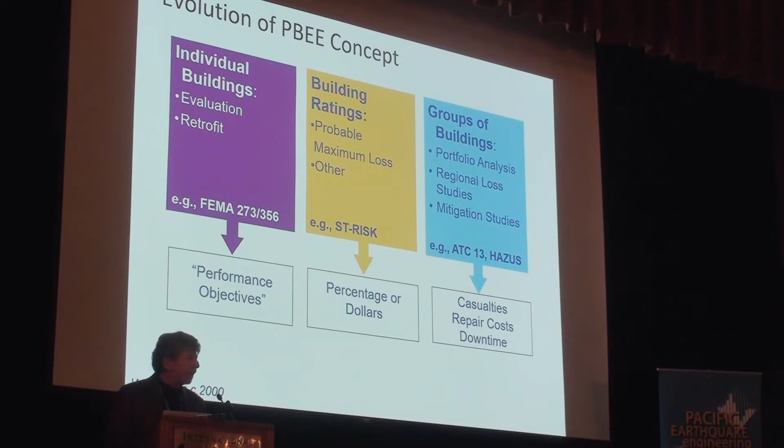In between was building performance ratings, the so-called PML, which is looking at dollars. Bill's point was really what PEER is after is kind of a convergence of these things—trying to bring them together under one performance engineering framework, if you will. And I think we successfully did that to a degree.

We certainly brought the performance engine into the building model. Folks are familiar with our triple integral equation, breaking down this process—going from the ground motion through the damage to the losses and the consequence. This maps over nicely to looking at an individual facility, or a bridge, or another thing like that.

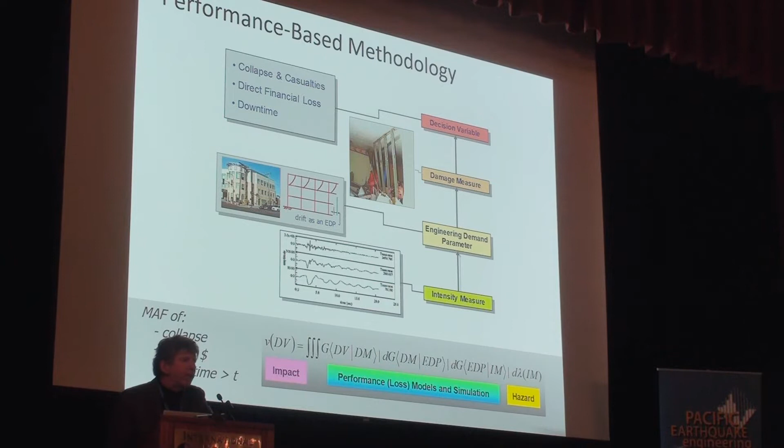In concept, it carries over to distributed frameworks as well. In fact, early on it was work by Anne Kiremidjian looking at transportation networks. But I think we still have a ways to go to take this methodology to these regional simulations that can, I think, really inform disaster recovery.

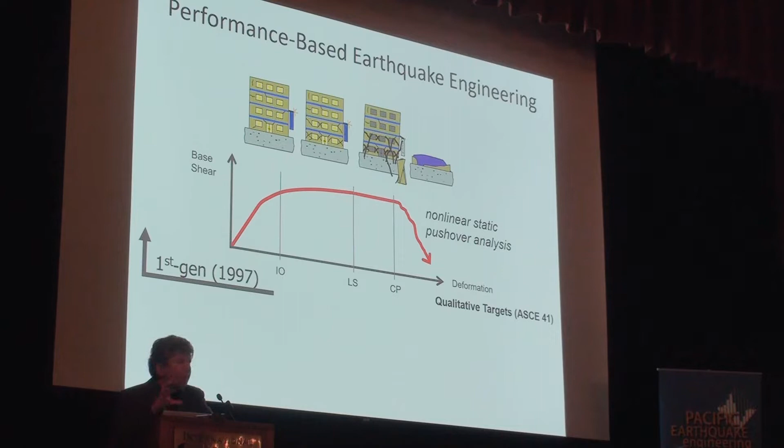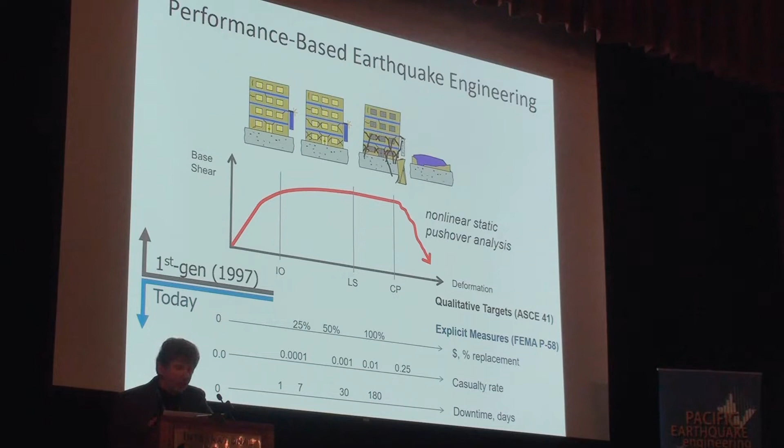At the time, again, FEMA 273 was our performance state of the art, if you will, for evaluating buildings. If you think of where we've brought that through today, through PEER's research and subsequent efforts, looking very quantitatively at the losses as a continuum, casualty rates in buildings, and downtime metrics—that was then pulled into FEMA P-58.

There's now software out, and it's becoming pretty routine for some engineering design offices to apply this to buildings and advise owners on looking at alternate structural types, how they could get higher performance buildings, and what would be the value in terms of the reduced dollar losses.

I think that the repair time, and further the downtime, are still things we're grappling with. I'll talk a little more about that.

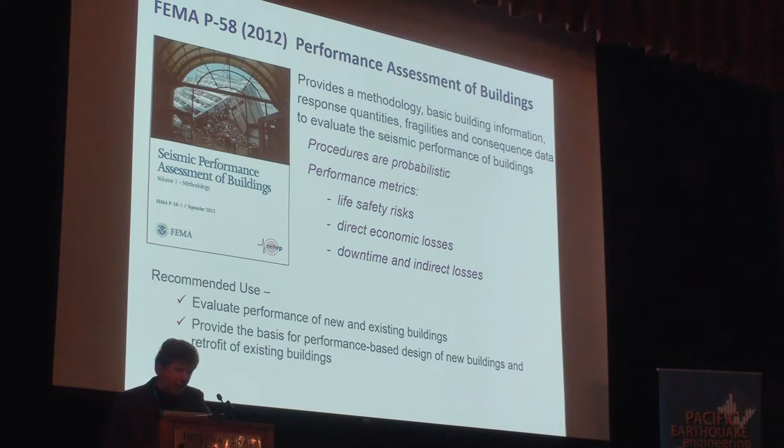About the same time, actually about 10 years ago, P-58 was coming out at the end of the first 10 years of PEER, when this technology and this framework had matured.

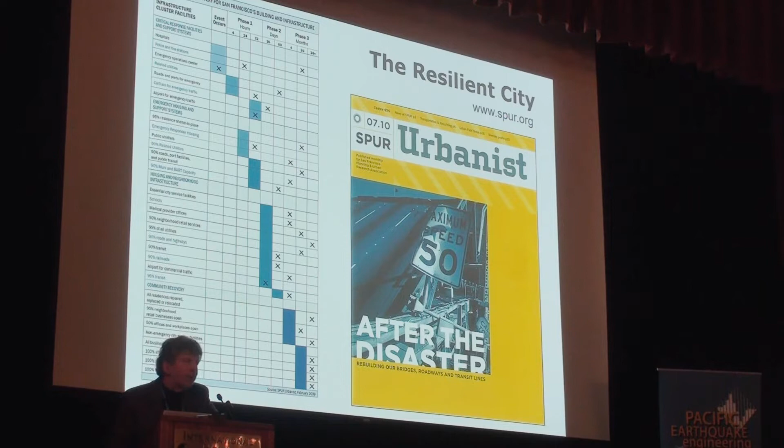San Francisco was underway with the so-called Resilient City Project from SPUR, championed by Chris Poland, along with a number of urban planners, city planners and so forth coming together to look seriously at the city—that is, if a big earthquake happens in San Francisco, what's going to happen to buildings and other infrastructure, how does that affect services in the city, and what's going to be the reality versus the target that would make the city resilient.

In fact, San Francisco, LA, and now through NIST, this whole notion of resilience and community planning has marched forward. The question is, how can our performance-based tools really quantify things and impact this?

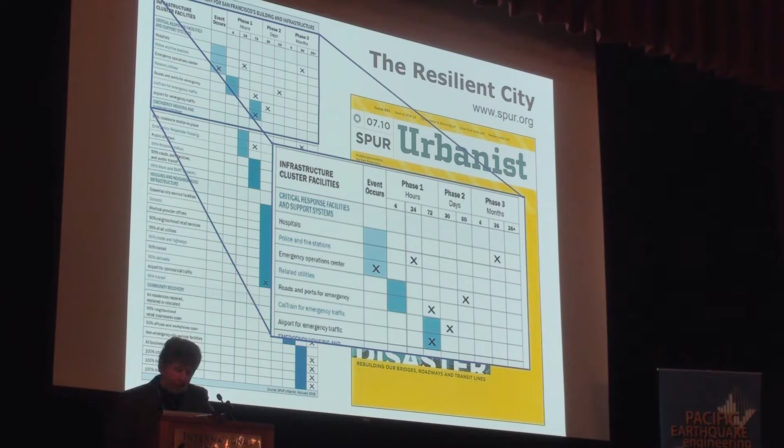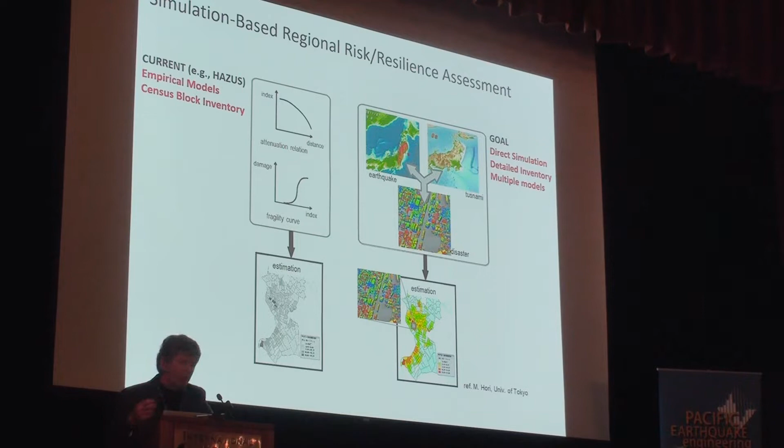How do we carry that forward, looking not just at earthquakes, but other hazards, but also the effect on our infrastructure, the effect on systems - piping systems, transportation - but also going forward to the economic systems. In the SimCenter, Sanjay Govindjee had a short talk yesterday where he talked about a number of the tools we're developing.

A key feature of that is these so-called workflows, these puzzle pieces. This is really the brainchild of Frank McKenna, who's here in the audience, the software architect for the SimCenter, together with Steve Mahin, who put the proposal together for this with Frank.

Thinking of all the computational tools we have, starting at how we define assets, the inventories and what sort of technologies to build inventories, how we describe the hazards - it could be with ground motion prediction equations.

Jack Baker talked about using some of those yesterday. Dave McCallen just talked about earthquake simulations. You could think of tsunami simulations and so forth.

And then what's the effect of those hazards on the built environment? What are the damage and the losses?

It's really putting together a computational framework for, if you will, the PEER framework - what we do for an individual facility. But the idea is taking these models and putting them together so you can plug and play conveniently, so it's not a huge research effort to do so, and you can start to do regional simulations with the whole community.

Just as the triple integral equation was a very unifying concept for PEER - in other words, people could see where their research plugged into it.

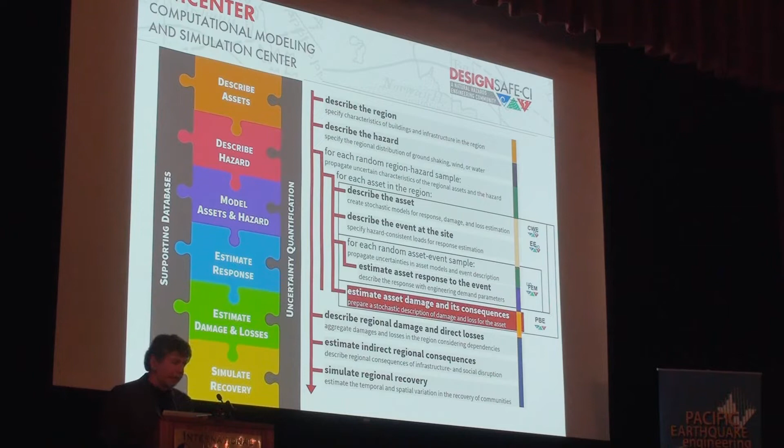Similarly, as we take models and make them computational, we have data sets to see where they plug into this kind of computational flow.

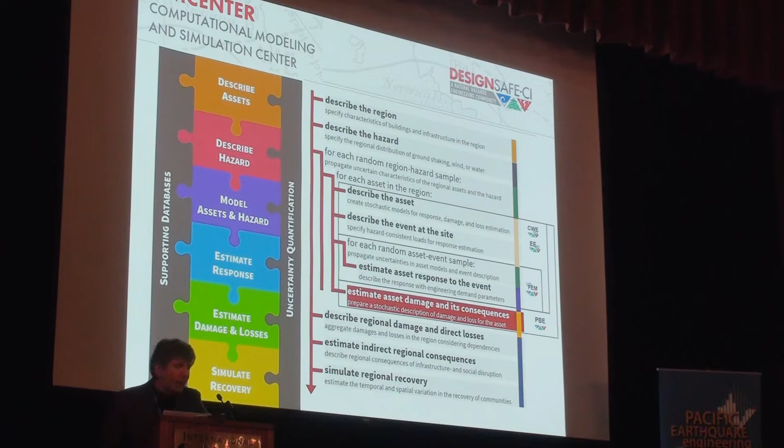Keep in mind too, we want to characterize the uncertainties throughout this whole process, as Dave described. As you start to do exascale computing, you could do these simulations over and over again to capture the uncertainties throughout not just the ground motions, but the whole loss estimation and recovery process.

One of the testbed studies we did was actually using some of Art Rodgers' simulated ground motions, taking 1.8 million buildings. These were OpenSees models that were put together.

Along the lines of what Dave described, we didn't have it on our own system - we were actually using the Stampede computers through DesignSafe. We had to infer something about the general population of buildings in the Bay Area, infer something about structural systems.

So models to do those inferences, doing FEMA P58 type loss assessments, and getting estimates of what would be red tag buildings and what would be the losses from those.

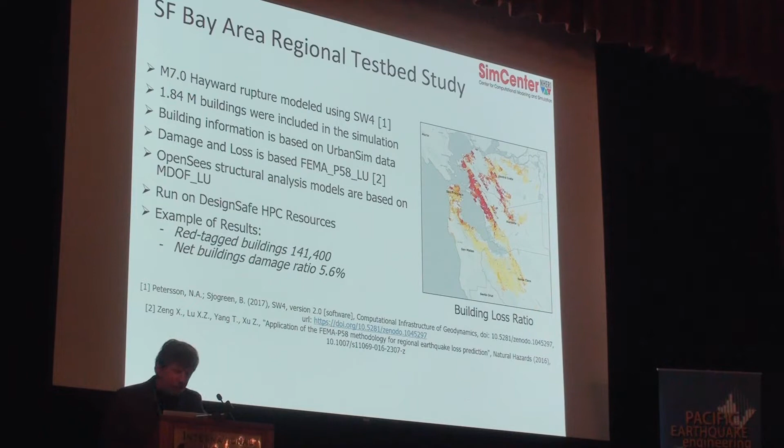This is actually the same scenario that recently came out as the HayWired, about 2018. I contrast here the results we have, SimCenter on the left side and HayWired.

HayWired is using kind of HAZUS technologies where the building inventories are by census block. You notice when I first saw our picture on the left, I wondered why it was so striated like that. And of course, there's no building sitting on the Hayward Fault.

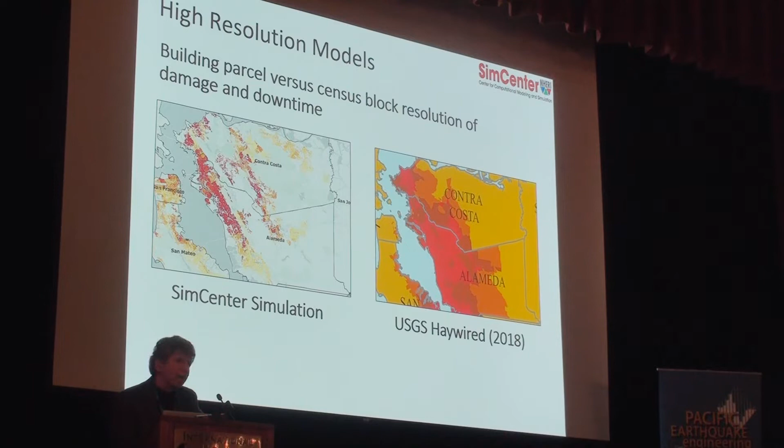So the damage there really reflects, firstly, the population density of buildings, and then how severely they're being damaged. But this is a key part of these kinds of tools we're going after now - this high resolution, building by building, parcel level, component by component.

And you see pictures like this if we zoom in a little bit further. So if we could do these simulations, then the question is, what information can we start to use, and who's going to be interested in it?

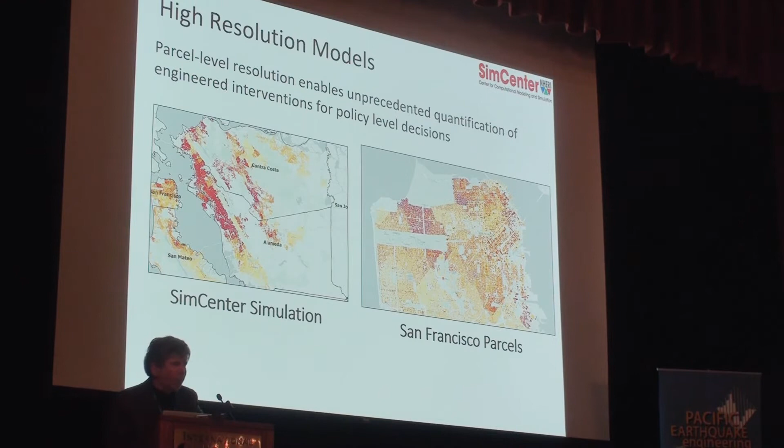When you talk to urban planners or people in cities thinking about vulnerable populations, instead of a census block for one part of a city, you could go block by block, identifying vulnerable masonry structures, cripple wall apartments, soft story structures, and really get high resolution. Then you could start to affect not just engineering the buildings or retrofits, but engineering the cities themselves, the urban planning for land use, retrofit policies, and so forth. That's the vision of where we want to take this.

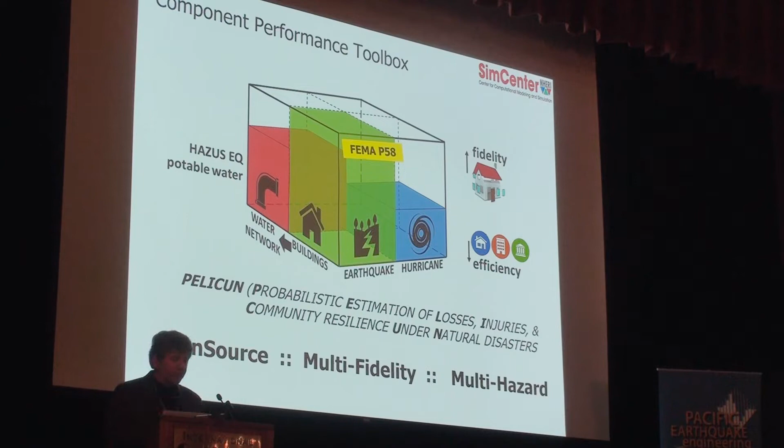One of the tools we've developed, Adam in the audience worked on this as a postdoc, is called PELICUN. Those familiar with the FEMA P58 methodology for buildings, the high resolution performance assessment for an individual building, this toolbox is built around that framework. But as you see in this graphic, we're trying to build it out beyond earthquakes and buildings, to look at other kinds of infrastructure, applying that same detailed methodology to pipelines, bridges, and so forth, and as part of NHERI, to look at other hazards, particularly hurricane.

This PELICUN tool is open source and multi-fidelity, meaning we can build in tools based on current methods in HAZUS. For example, for damage to pipelines, researchers are developing high fidelity models, but for now we plug in simplified tools. Sometimes you want to mix and match - certain parts of a city or region need high resolution detailed inventory, while others don't need as much. This trade-off lets you do regional simulations with some buildings or infrastructure built with very detailed high fidelity models and others with more efficient models.

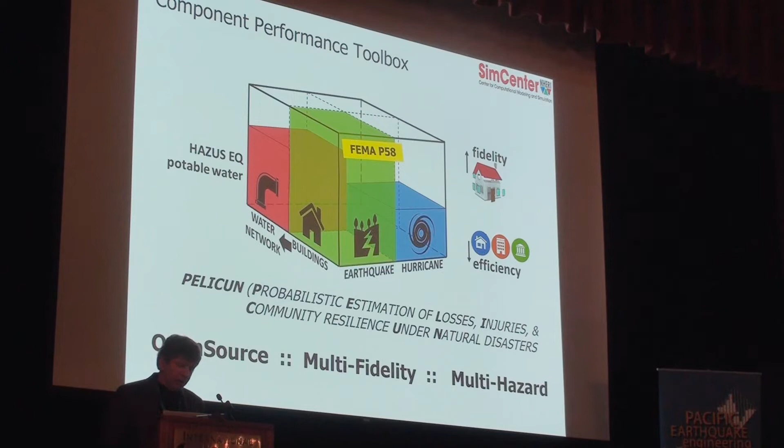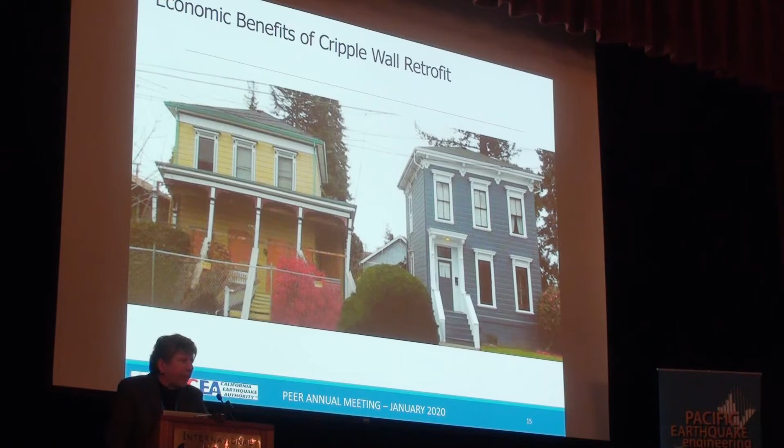Just a few examples you saw Holland introduce, and for those who went to the CEA session, looking at one of the PEER projects on the benefits of retrofitting cripple wall houses.

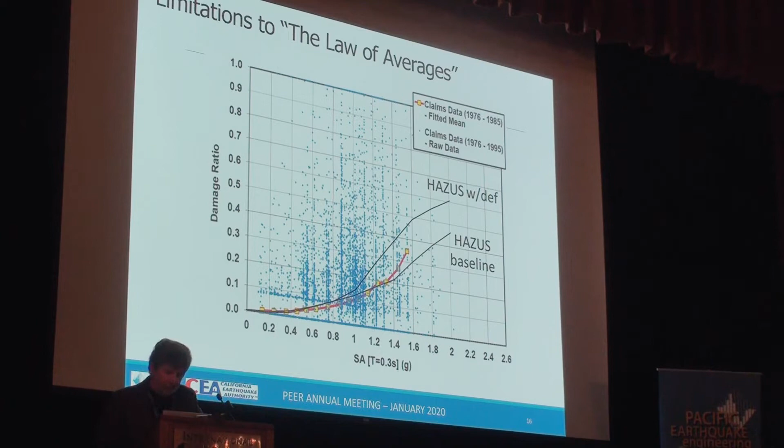But what if you're interested in what happens to individual neighborhoods, or the benefit of a cripple wall retrofit? This is the essence of that CEA-funded PEER project, taking a number of different house archetypes - different siding types, stucco, wood frame, one-story, two-story, different interior partitions - and looking at the different loss curves, and how losses reduce if you retrofit the house.

For the CEA, they're focused on two things: working with the insurance industry to give incentives through insurance for retrofitting houses, and also trying to benefit the folks of California.

But you can imagine other groups benefiting from this technology - if you build it into regional simulations, you could understand the parts of town with a lot of old houses, in communities like Oakland, San Francisco, or LA, where the damage might concentrate. I mentioned to Craig Davis, formerly with LA Water and Power, during the fires a couple years ago, what LA thinks about the water system. He said he's worried about downtown places with a lot of old houses where the water system goes through bad soil, leading to a lot of breaks. I said those houses are probably cripple wall houses, and they have gas pipelines coming into them.

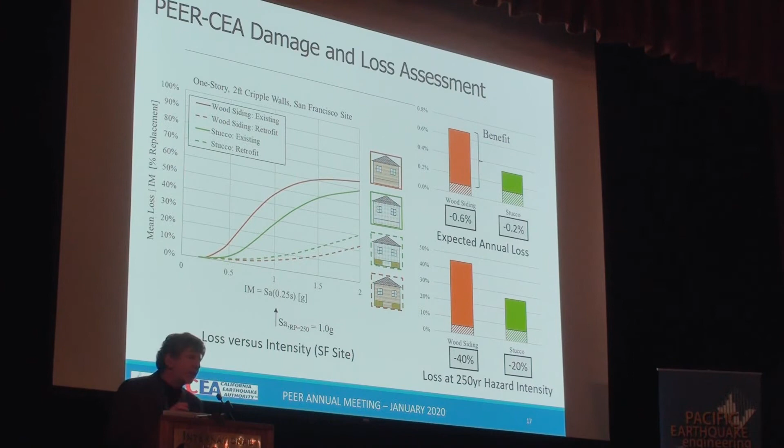So you can imagine this cascading effect you could start to pick up if you build these into regional models. Brian Strong mentioned this San Francisco tall building program. We worked on building an inventory of some of the tall buildings, understanding the different occupancies, structural types, when they were built, and foundation types.

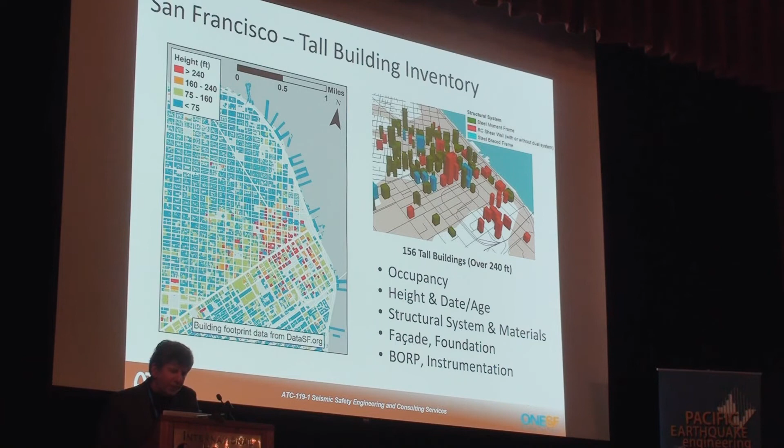That's an interesting subject in San Francisco these days. This shows an inventory of the number of tall buildings built through the different decades. The reddish ones are concrete, the greenish ones are steel frame moment frames, the bluish ones are steel brace frames. Looking at events in history like San Fernando, there weren't too many tall, at least over 240 feet, concrete buildings in that inventory. But looking at the Northridge earthquake, where we got alarmed at the performance of steel frame buildings, you see most of the tall steel frame buildings were built prior to Northridge.

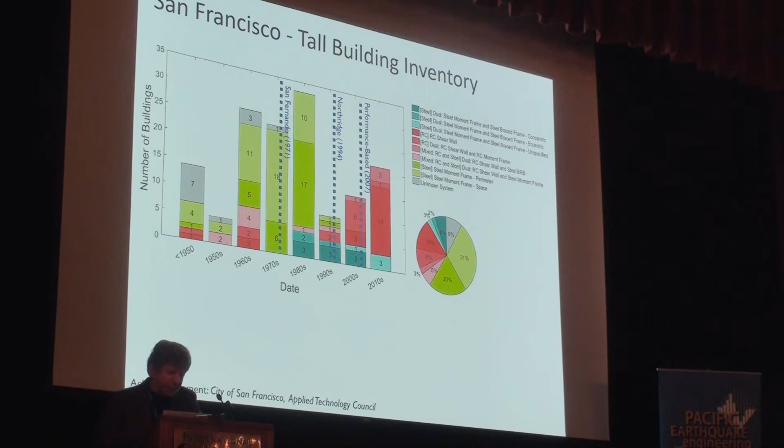There's also the advent of performance-based tools, which buildings at that point and beyond, we have more faith in, using better methods of analysis. So one thing that came out of this was identifying the number of these tall pre-Northridge steel moment frames and clustering them in downtown. Brian Strong mentioned this in his talk yesterday.

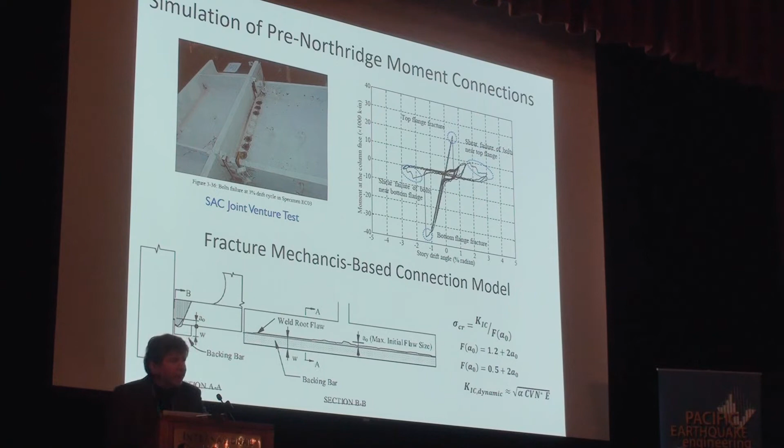Since Northridge, that was now 25 years ago, we've built better computer models. In research, we've continued to work away at fracture mechanics type models to simulate, say, the connection failures. So we could go back and look at some of these buildings now and think, can we start to predict this damage better than we could 25 years ago? And I'd like to think we can.

But then also to look at some documents like FEMA 352, developed by the SAC project, that looked at evaluating and tagging and looking at the safety. It was kind of very qualitative, had quantitative numbers, but based on judgments that were in there.

I think a question we have to ask today, if the Northridge earthquake happened and we got the connection damage of the type shown there, can the building be occupied while we repair it? Or is this building so damaged it's not occupied, but it might be a danger to its neighbors? So I think this is an important challenge. Is it safe to occupy during repair? Because that's a key part of this reoccupancy, but also looking at the neighboring buildings downtown.

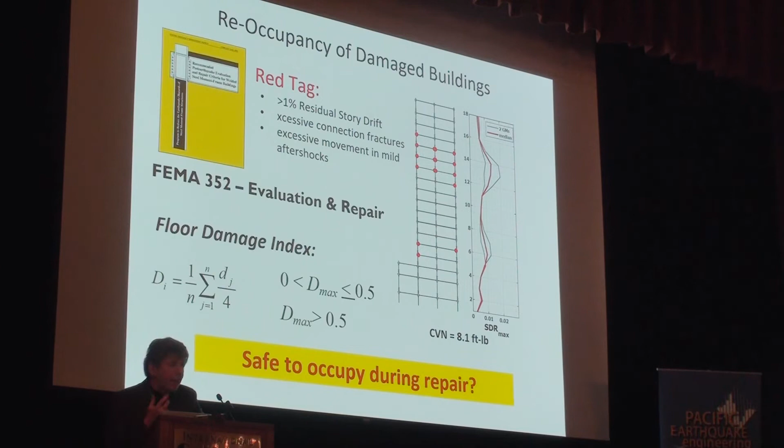And then it also gets into this whole concept of functional recovery, which is an emphasis now in the NEHRP reauthorization. This is important because suppose in a building like that, you estimate it's going to take 2 months to fix the repairs that you saw there. Well, if you decide the building's not safe to occupy, you have these impeding factors before you could get those repairs underway that might extend that total repair time to 9 months. And if you cannot be in the building over those 9 months, it's a much different story than if you could be in the building while it's repaired.

So I think these are another hurdle or another challenge we could face, but we have the technologies to do it, so we could start to apply them to problems of this sort to look again at recovery of communities. Jack Baker showed some of this work yesterday, and Anne Hulsey, our student, had a paper on it, and Charlie, you mentioned cordons a minute ago.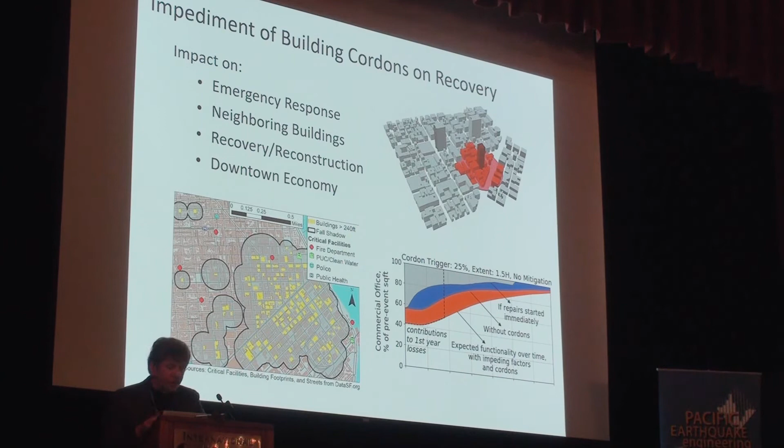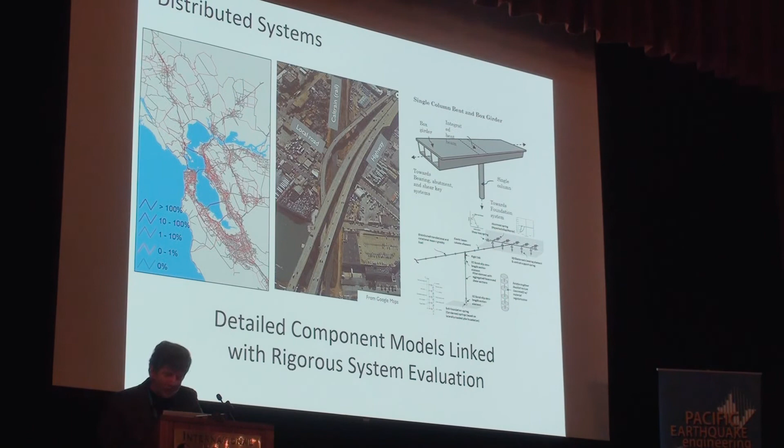You could take those same concepts and carry them over to any other system, like distributed transportation systems, having a mix of low and high fidelity models of bridges. This is a picture from some work Jack Baker did. When we think of a bridge, you could identify it on a map, but if there's a bridge with a road under it that has another bridge nearby, can our models have the resolution to understand the conflicting effects? I was talking to Ian Buckle about a bridge that has a refinery underneath it, so we need to build those things into our models.

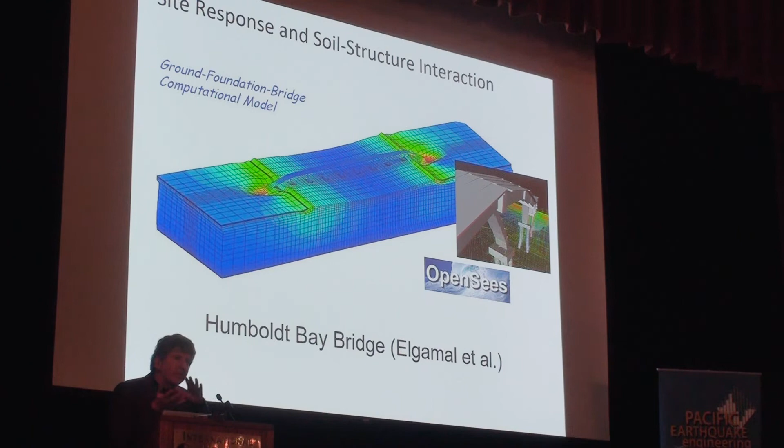I'd be remiss if I didn't remember my geotechnical friends here and pull up Ahmed Elgamal. I'm not sure if Ahmed is still here. The old Humboldt Bay Bridge, one of our test beds from the early PEER days. I'm always humbled by this, to think, as a structural engineer, that there's a lot of soil underneath that bridge to really understand. That's part of this picture as well, and it interfaces, Dave, with what you were showing with the earth scientist simulations. There's that geotechnical layer we need to build into these models.

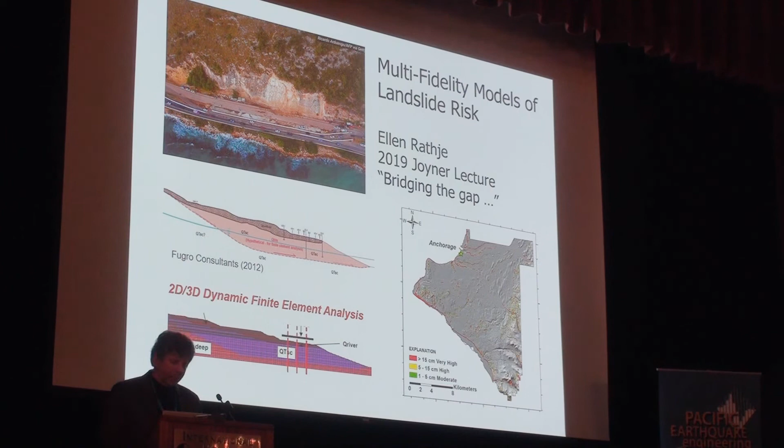Of course, there's more work to be done. I was reminded of Ellen Rathje, some of you might have seen her Joyner lecture from last year. It was looking at bridging the gap between a geotechnical engineer's view of modeling landslides and an earth scientist's view, really looking at multi-fidelity models. The engineers take a higher fidelity model compared to what's looked at regionally from the earth scientists. So you could imagine these regional models can similarly build in the fidelity of models, not just for buildings and bridges in the geotech, but looking at things like landslides and their effect on roads and other things. Mixing and matching, this concept carries over to any of these.

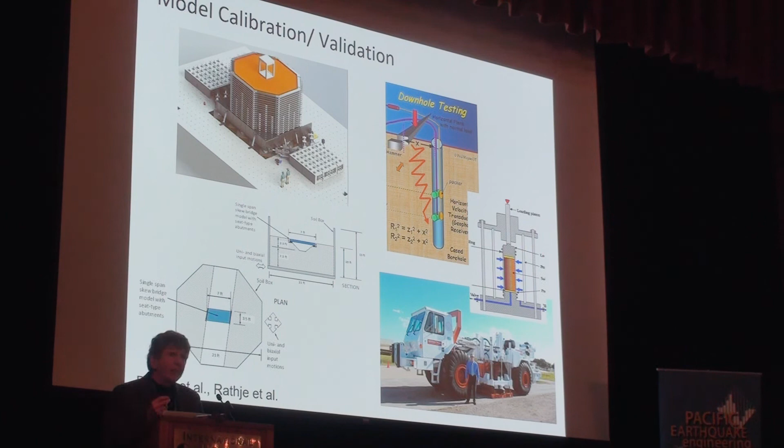One of the questions we get asked is, how are you going to validate these regional models? The reality is we're going to have to wait a while till we get enough events to validate them, but in the meantime, we're putting up benchmark exercises where I could run a model, or we put it up there, run an analysis, and someone could say, if I plug in my ground motion model, I get a different answer. We could start to benchmark them against each other. In fact, that's what the earth scientists on the earthquake simulations are doing, exactly that, to, if you will, I don't know if the word's validate, but gain confidence in their earthquake simulations.